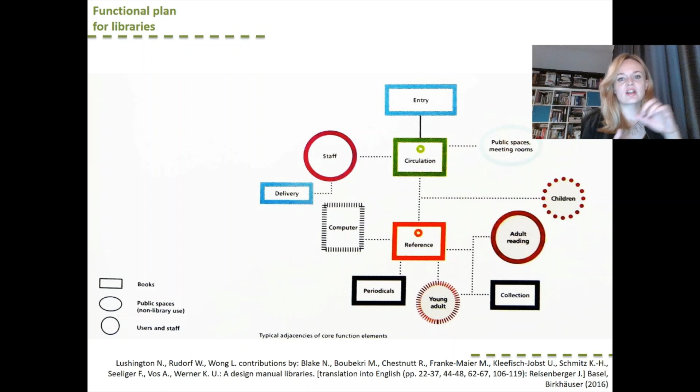This is a more built element for a library. You can see that there are different places for young adults, for children, for adults. So there are these additional elements that you would have in the typical library. These two next slides will be basically rather for your future.

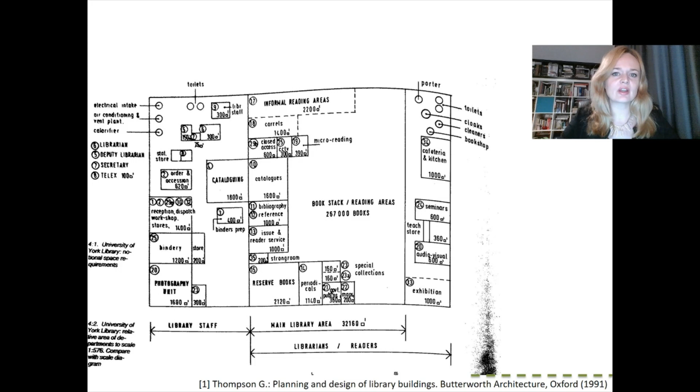So you can see here the full library scheme, the example of a library that has elements of the cafeteria, that has huge reading areas, reading rooms, that has additional seminar and audiovisual rooms. You can see here the catalogs, the bibliography references. You can see quite a large area for staff, which is basically not accessible for all users. You can also see here elements like a photography unit, where archive materials and other types of materials can be photographed and stored in digital form.

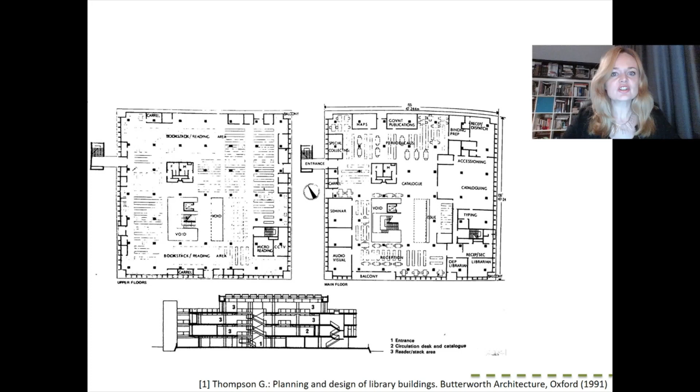And here you can see the multi-story library, and you can see that on one of the floors you have a huge reading room, which has an open stack, so there are shelves inside, which can be used by the users while they are inside the library. And you can see the other floors with additional spaces, but also a lot of spaces with specific rooms and elements like map reading, seminar rooms, audiovisual rooms, which allow the multifunctionality of such a facility.

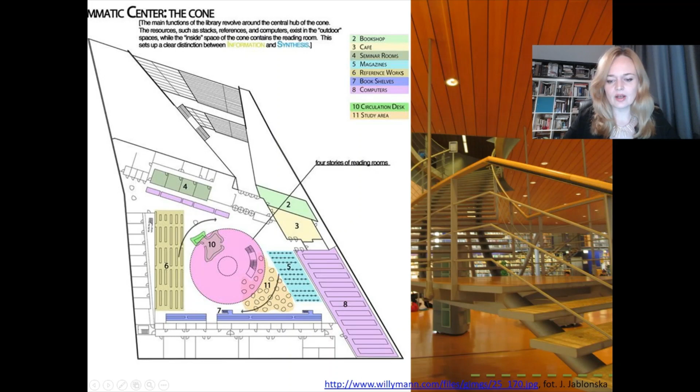In the middle there's this cone that finishes with the tower that you've seen from the outside. And you can see here the entrance to the cone. Of course, it's all accessible by elevator, and inside the cone there are some workrooms which allow larger groups of students to meet and to read together. I have already mentioned the reading room and the shared space.

What is important while designing these kinds of spaces is to create a clear view. So it's usually rooms that do not have columns inside. They need this kind of design where they are free and they are large span spaces. They have to have working tables, and again, the long tables that used to be in libraries are no longer there. It's more like working spaces for groups of people. And the seating arrangements can have very interesting forms. We'll see some examples of that in a second. And there should be some comfortable spaces for casual reading.

The open stack that I've mentioned is a concept of people being able to access the books while they're inside the room, and it comes from the 1930s. And what is important is that you need a larger distance between the shelves than you would have in spaces where the staff is giving you the books. So the shelves have to be distanced from each other by 1.80 meters.

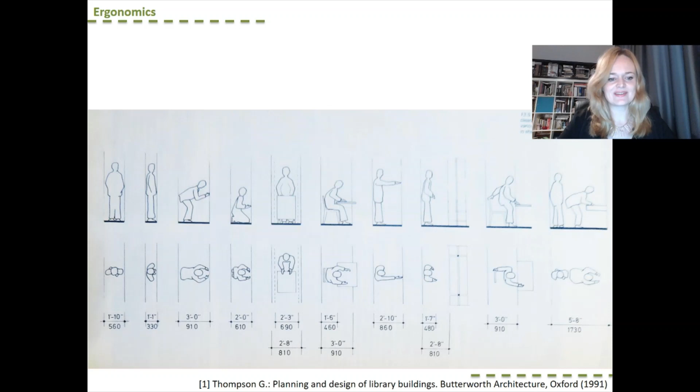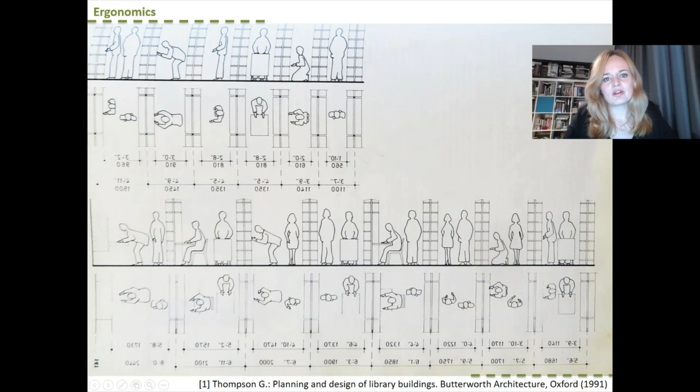And here you can see the spaces and the distances, the need for space, depending on if you need to lower yourself to get some book, maybe you need to kneel. So this distance between the shelves has to be at least 90 centimeters, the minimum. Here you can see the situation where you have more people using the library, and again around 1 meter 80 when you have an open stack.

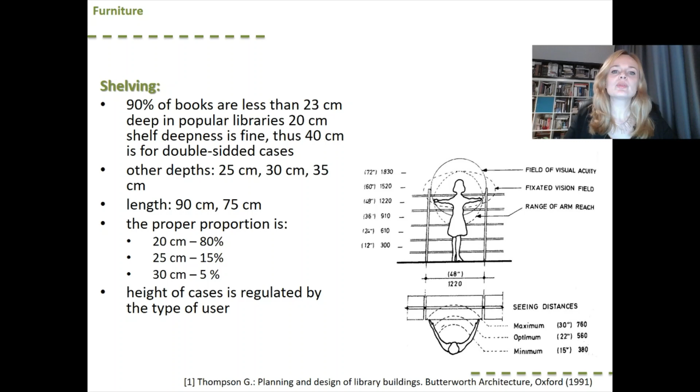So this is one more slide with an open stack in the library. And here you can see the different ranges in the library for children. So the books cannot be too high for the youngest generation. And here there is some information about the types of shelves. What is very important is that around 90% of books are less than 23 centimeters deep. Therefore, the proper proportion for bookshelves is about 20 centimeters depth for 80% of shelves, 25 for 15%, and 30 centimeters, for albums, about 5% of the shelves in the library.

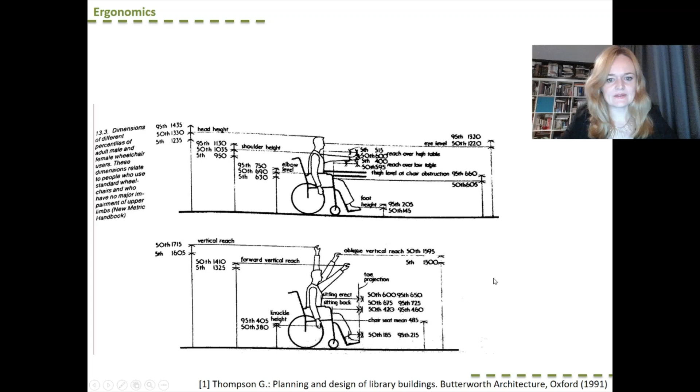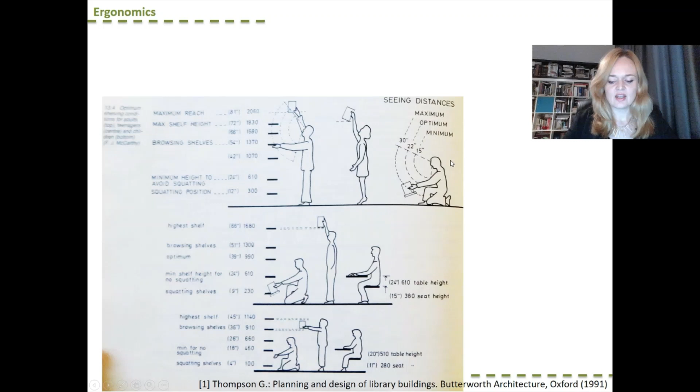Again, a very important issue is people reaching for the shelves from wheelchairs. As you can see, you shouldn't go more than 1 meter 50 with the books, so they would be accessible for people in wheelchairs. Here for people in a standing position, and also you can see the visibility of the eyesight, how high you can go with your eyesight while selecting the books.